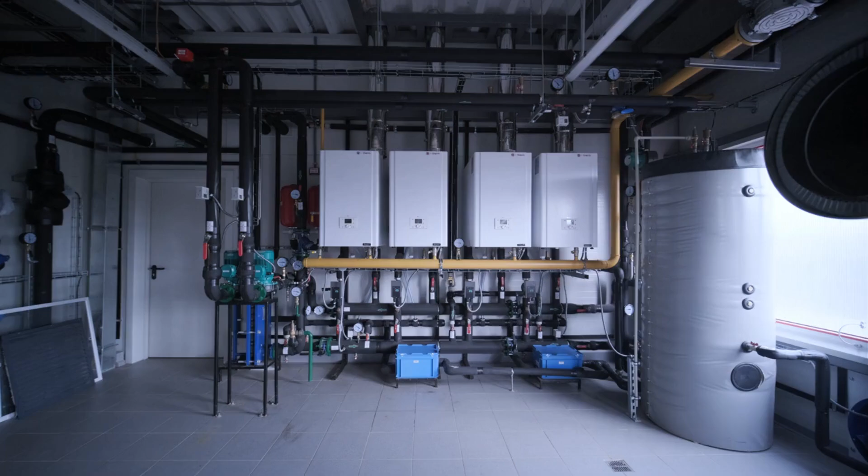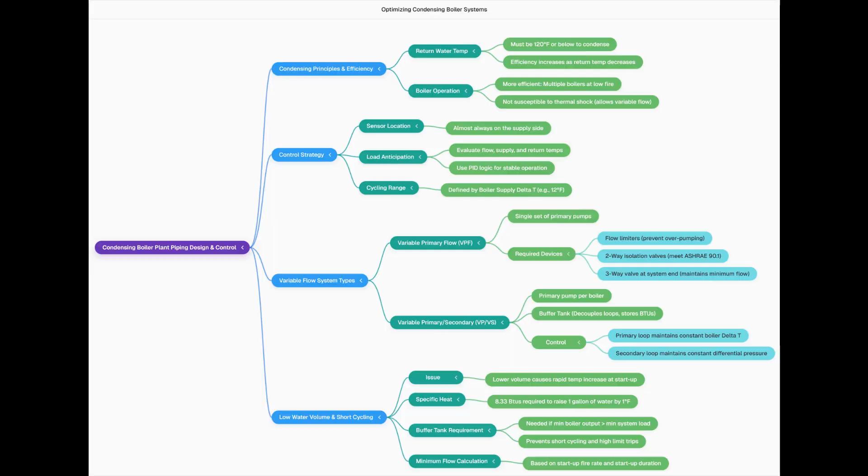Modern condensing boiler systems offer high efficiency and precise control. Optimal performance depends on temperature sensing, flow control, and energy storage management. Let's explore how control, variable flow, and buffer tank sizing ensure an efficient, stable, and long-lasting condensing boiler system.

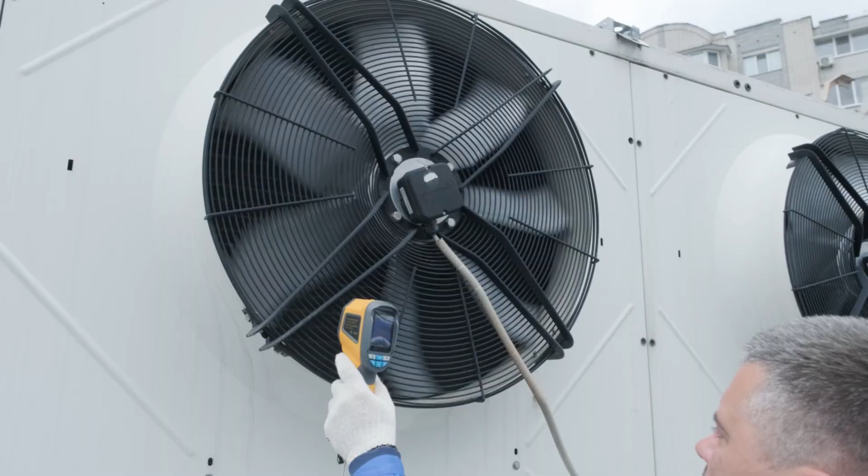Older systems controlled boilers using return water temperature, causing slower responses to load changes. This led to fluctuating space temperatures, comfort complaints, and cycling issues. Modern systems place the temperature sensor on the supply side for faster feedback and immediate response to heating demand.

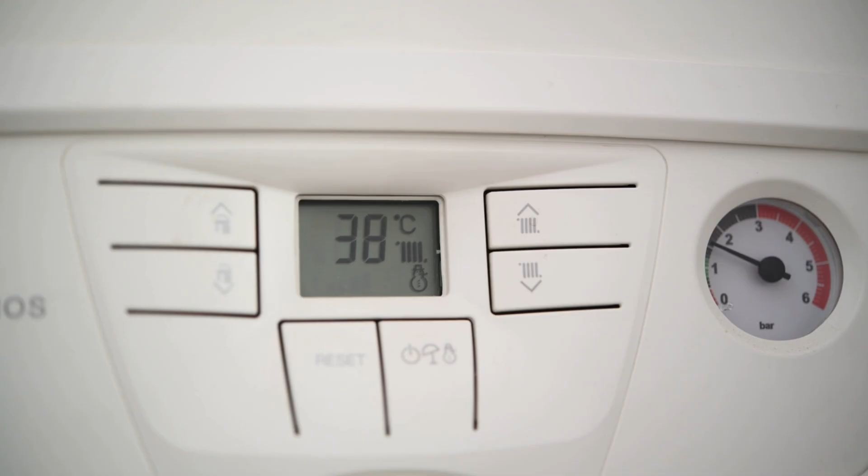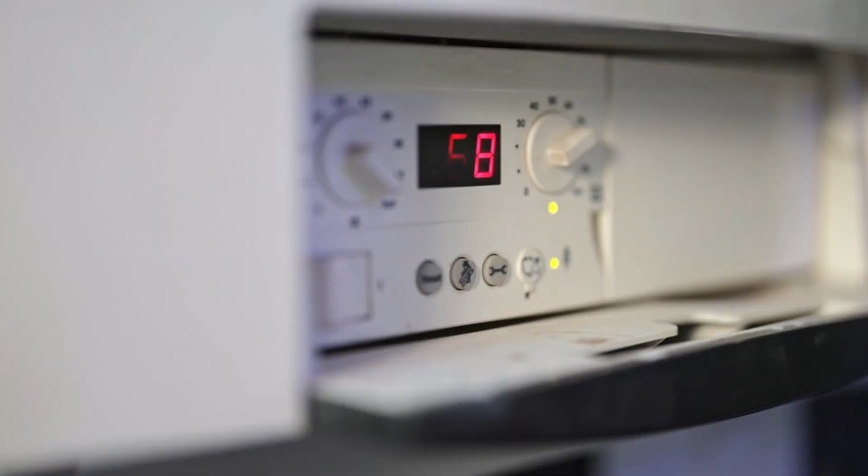Condensing boilers are most efficient when return water temperature stays below 120 degrees Fahrenheit. Cooler return water increases condensation inside the heat exchanger, recovering latent heat from flue gases. Thus, as return temperature decreases, efficiency increases.

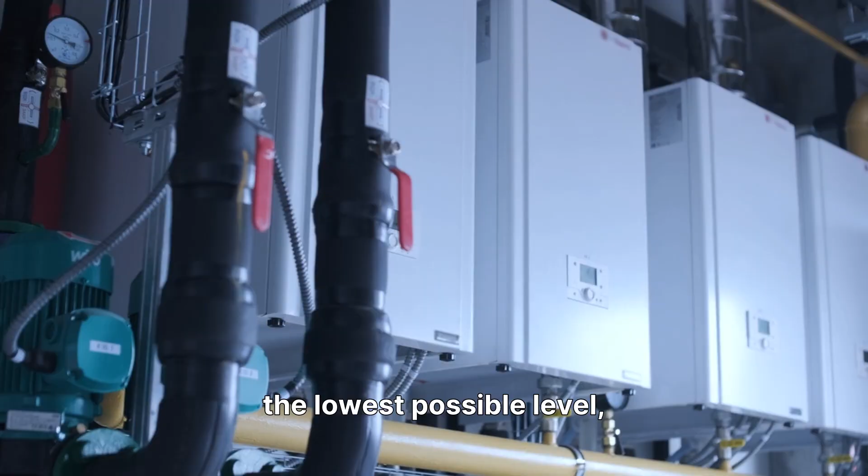The ideal control strategy anticipates load changes by monitoring flow rate, supply temperature, and return temperature. It modulates each boiler's firing rate to maintain the lowest possible level, as multiple boilers at low fire are more efficient than one at full fire.

Older boiler designs avoided variable flow due to concerns about thermal shock. However, modern full condensing boilers feature robust stainless steel or aluminum heat exchangers that safely handle variable flow. This eliminates the need for mixing valves, constant primary flow loops, or high return temperatures. We can now design for variable flow, provided pumps and boilers operate within their rated flow ranges.

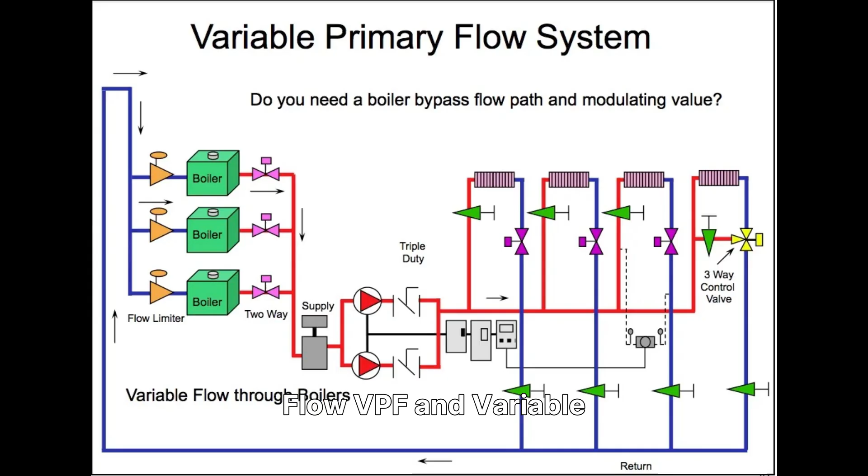Today, two main configurations are used: variable primary flow (VPF) and variable primary/variable secondary (VP/VS). In a VPF system, a single set of pumps serves both boilers and the distribution system, with flow varying based on demand. ASHRAE 90.1 requires flow reduction when a boiler is off.

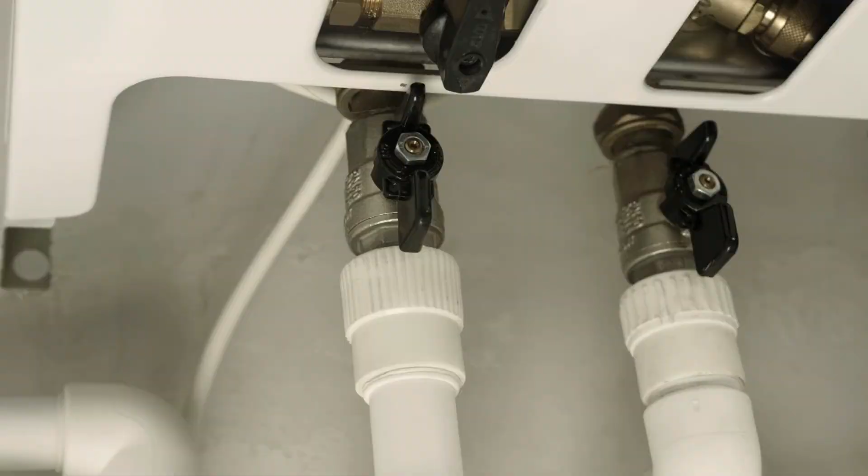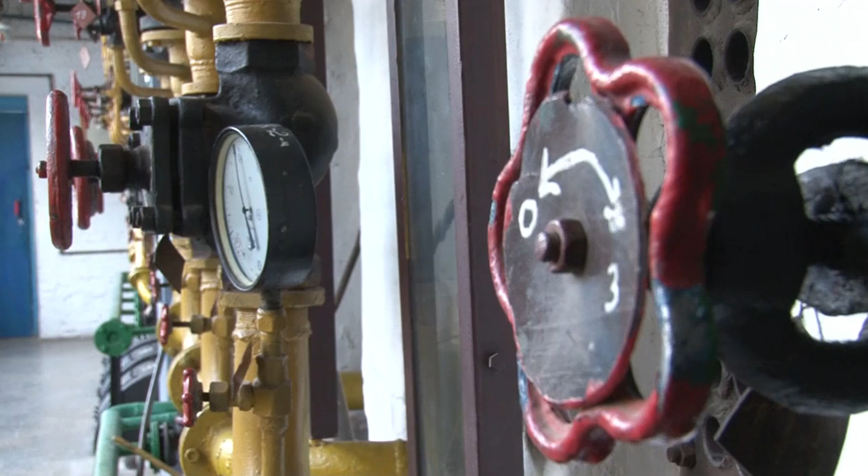This requires flow limiters at each boiler inlet to prevent overpumping. Two-way isolation valves stop flow through an idle boiler. Pump valve interlocks ensure no pump runs unless a valve is open, preventing deadheading. When a boiler shuts down, the pump runs briefly to remove residual heat, and the isolation valve closes after a short delay. Control logic must maintain minimum boiler flow during startup.

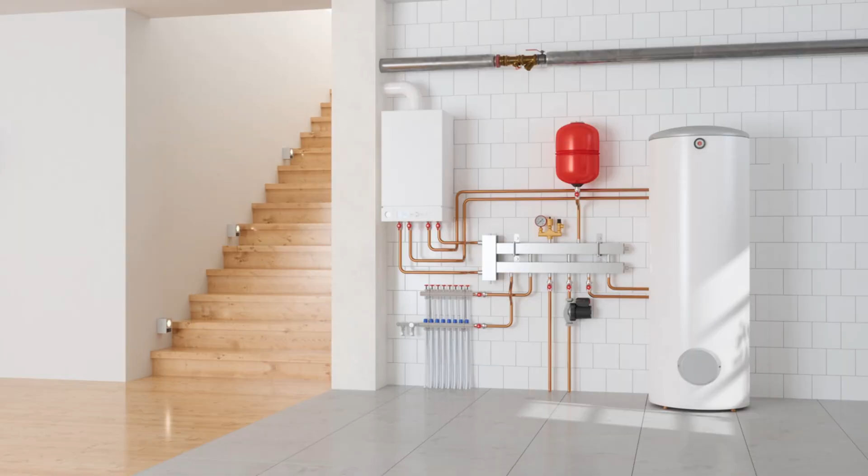It must also keep minimum pump flow for staging. Overall system flow must never drop below the manufacturer's specified minimum. A three-way valve can bypass flow when coils are closed, ensuring minimum flow during startup and shutdown.

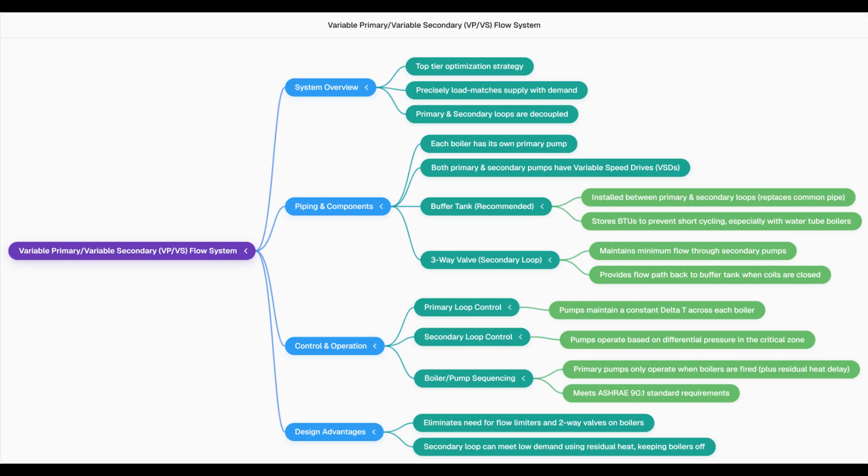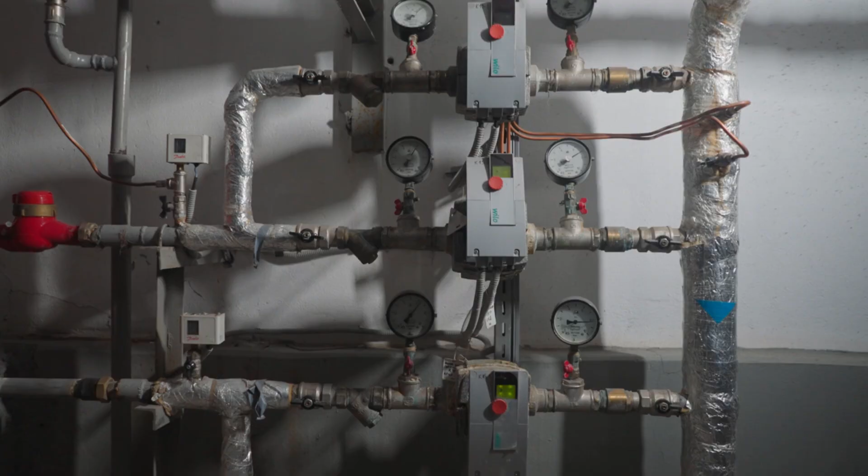Now let's examine the variable primary/variable secondary configuration, often considered a top-tier approach. Each boiler has its own primary pump, and a separate secondary loop circulates through the building distribution. Both loops can vary flow independently. At low load, the secondary loop may meet demand with residual heat from the buffer tank, potentially eliminating the need for boilers or primary pumps to run.

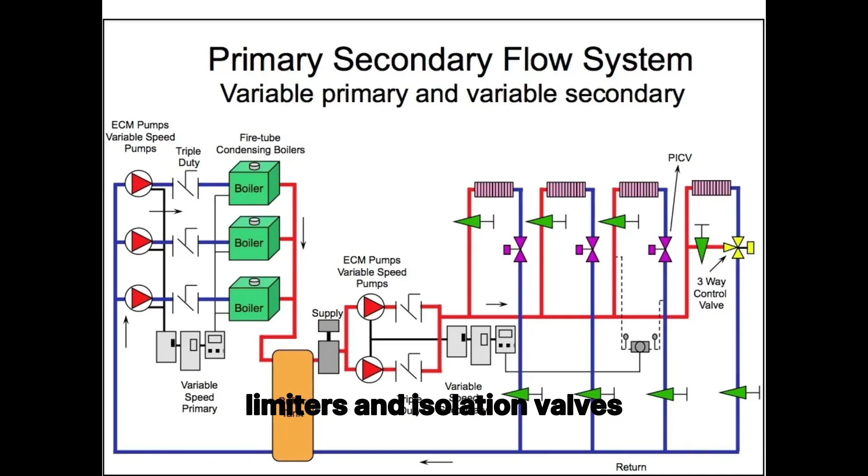Since each boiler has its own pump, flow limiters and isolation valves are not required, automatically complying with ASHRAE standards. A buffer tank is often added between the loops, especially with low water volume boilers, to store BTUs, increase boiler runtime, and prevent short cycling.

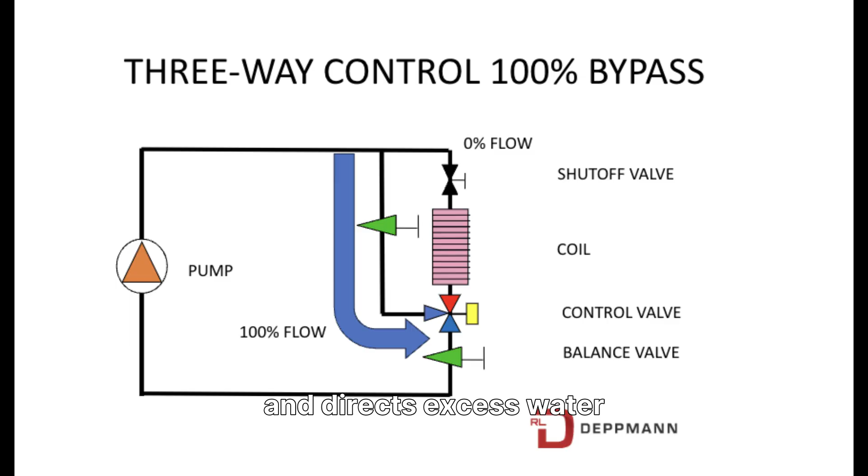In the secondary loop, variable speed pumps operate based on differential pressure in the critical zone. A three-way bypass valve maintains minimum pump flow and directs excess water back to the buffer tank when zone valves close, preventing deadheading. The primary loop maintains a constant temperature rise across the boilers, while the secondary loop maintains constant differential pressure across building loads, working independently.

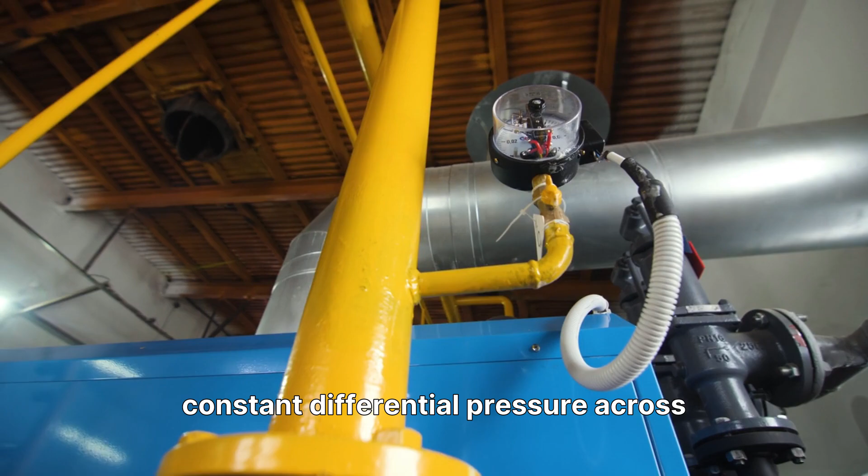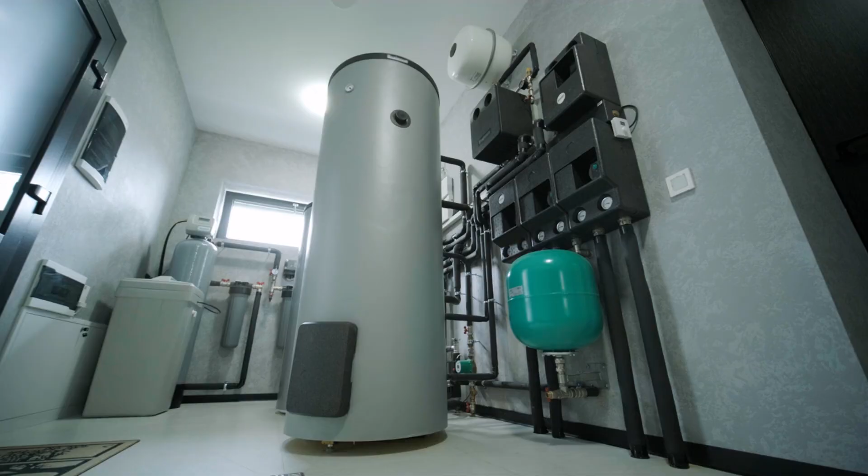A buffer tank is essential when the system's total water volume is insufficient to absorb excess heat, common in low-mass or modular systems. The buffer tank stores excess BTUs, extending boiler runtime and preventing short cycling. Proper sizing depends on the minimum desired runtime, usually 10 minutes.

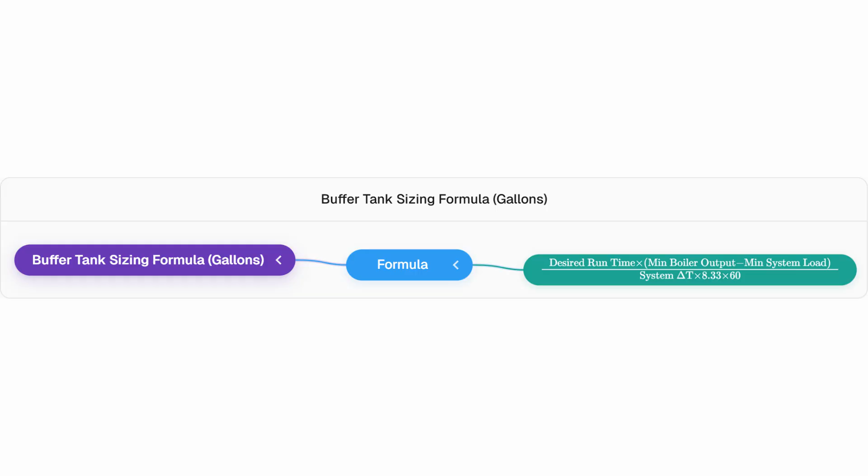It also depends on the minimum boiler output in British thermal units per hour. The minimum system load in British thermal units per hour is another factor. Finally, the system delta T in degrees Fahrenheit is crucial. The formula uses constants 8.33 and 60 to calculate the required gallons of storage. This ensures smooth boiler operation without constant on-off cycling.

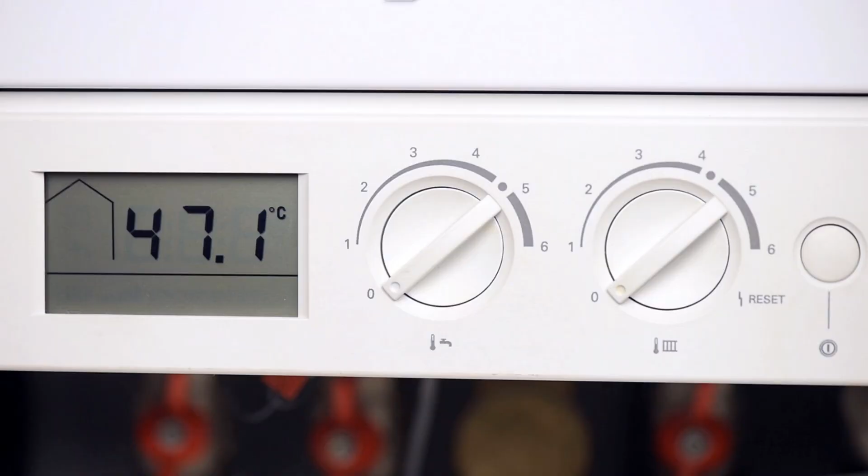Understanding the boiler supply delta T, the difference between start and stop temperatures, is critical for sequencing multiple boilers. A typical boiler delta T is around 12 degrees Fahrenheit. For a 180 degree set point, it fires at 174 degrees Fahrenheit and cycles off at 186 degrees Fahrenheit.

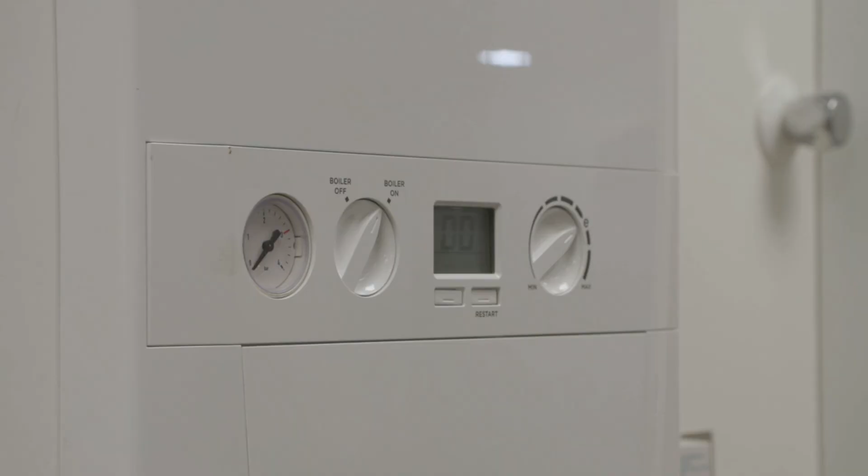Modern boiler controllers use PID logic to manage this precisely, sensing supply and outdoor air temperatures to adjust firing rates smoothly. When load decreases and the secondary loop removes fewer BTUs, supply temperature rises, signaling the controller to reduce firing or shut down a boiler. This results in stable operation, longer component life, and higher seasonal efficiency.

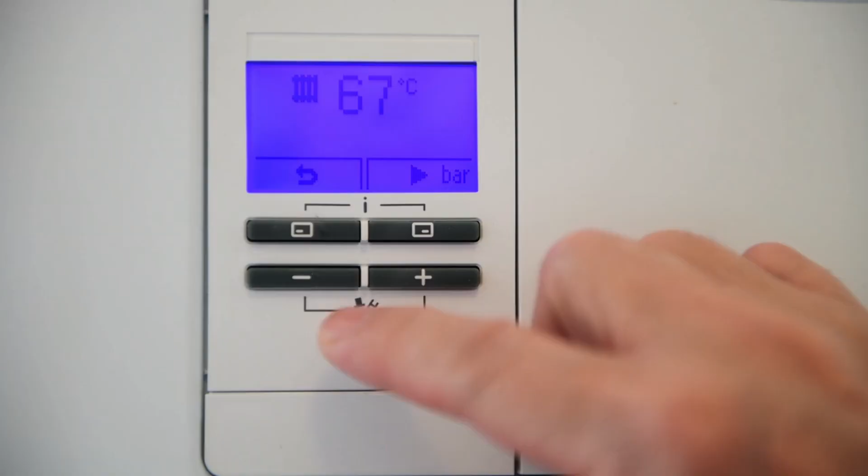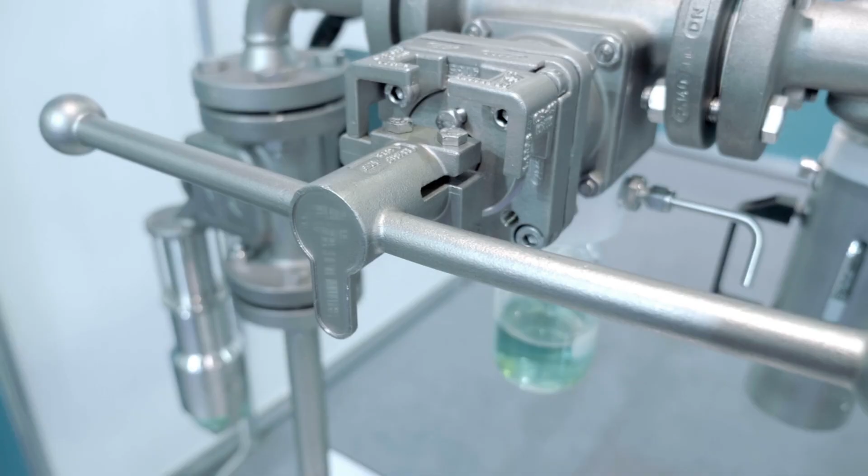Recap: controlling on supply temperature provides faster response and better comfort. Keep return water below 120 degrees Fahrenheit for maximum condensing efficiency. Design for variable flow, as modern boilers handle it safely. Include flow limiters, isolation valves, and interlocks in VPF systems. Use dedicated pumps and buffer tanks for VP/VS designs to prevent short cycling.

Maintain independent control of the primary and secondary loops. Proper buffer tank sizing ensures steady operation. Always tune boiler controls with PID logic for smooth modulation and sequencing. Applying these strategies creates a quiet, efficient, and reliable condensing boiler system across all load conditions.